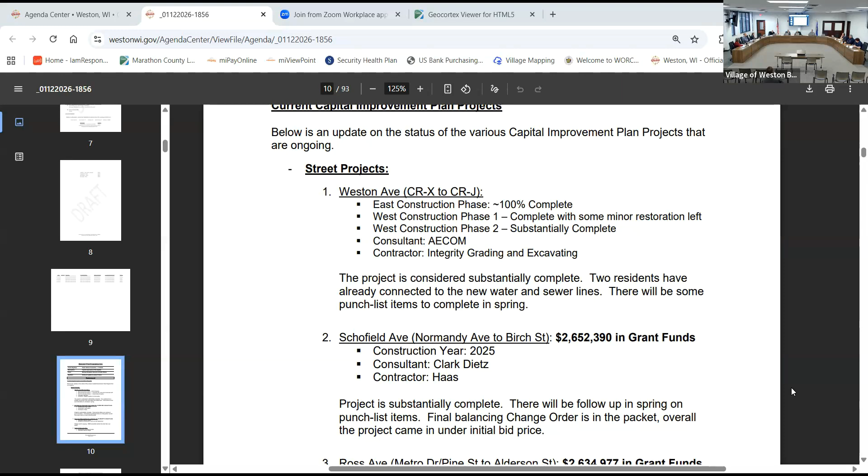And today we were notified that the Village of Rothschild is looking at repaving Bellwood Ave, which is one of our older water main areas just off Alderson Street, north of Weston Avenue. So we're going to see if we can quickly sneak in a water main replacement on that roughly quarter-mile stretch of roadway this summer.

So that actually is helpful. Yeah.

This right of way for the roundabout - how much does it affect people at those corners where they're taking property? At Metro, the majority is the southeast corner. Really, at both projects - Alderson and Metro - it's that southeast corner that's impacted more. Alderson should be easy because it's open.

And the Metro Drive one, if you remember we looked through that, is almost a little more oblong-shaped to avoid that greenhouse. There's a couple of houses pretty tight to the road there, so that was about moving it over closer to that southeast corner.

And it's working good, they're not angry or upset. The first meeting we had with those residents, there were some choice words exchanged initially, and then once we got through it all, now the residents there are actually pretty happy.

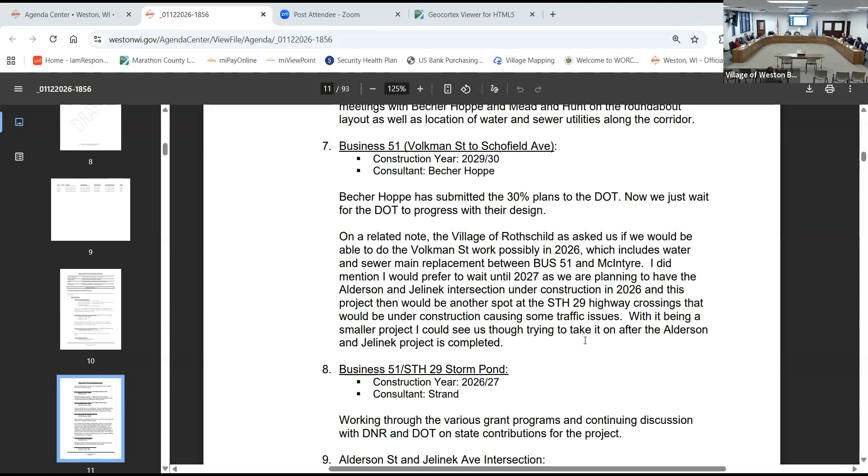Anything else, Michael? I don't think so. If I missed something I'll come back to it later. I finally got back up and running. Any questions for Michael? Nope.

Do the results of that bike and pedestrian master plan impact any of this? Because there was one in here about what's our preferred design for future roadways, including pedestrian paths. You're talking about Concord, the typical section? Yeah, the Concord typical section. I mean, that's just specific to that project. That was just my thought as I read through, I saw your notes and thought, does that impact that decision, or we don't know what the report is yet? I don't believe Concord Ave itself was noted as necessarily an area of concern village-wide.

I just wanted to bring it up as it went through.

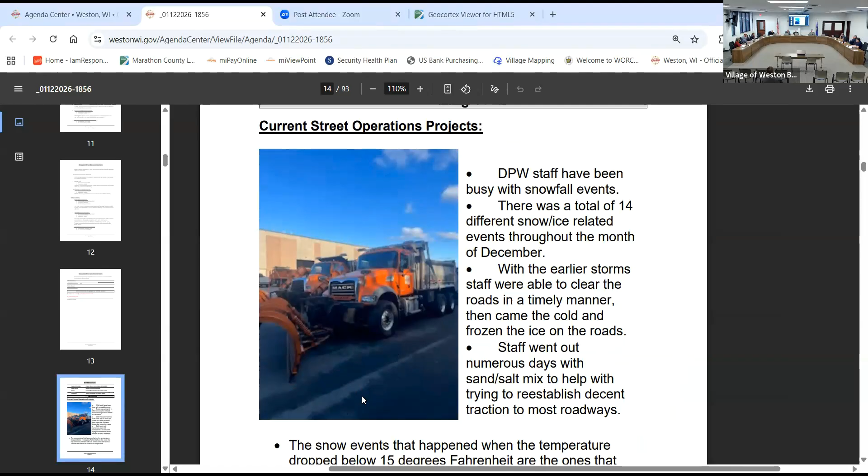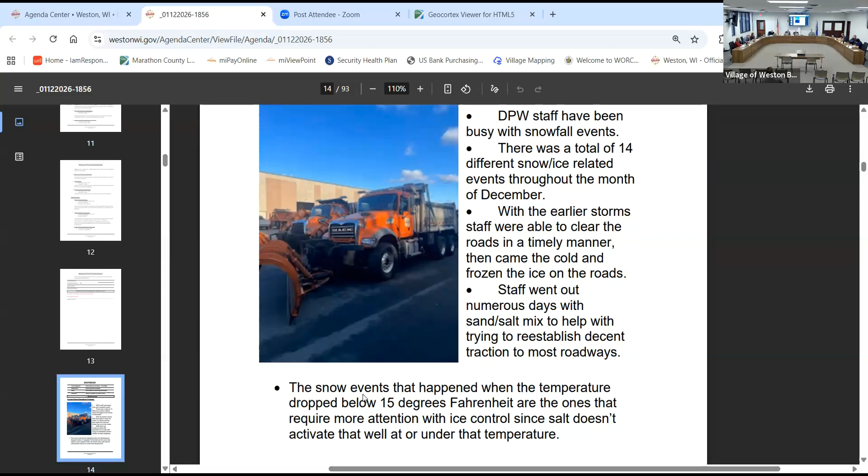Item 8, street operation update. DPW staff has been pretty busy with snow events, a total of 14 of them added up throughout the month, a lot of them smaller, some bigger. Staff was able to keep the roads clear in a timely manner, but then came the cold weather and packed the snow down. That meant a lot of trips out multiple times with sand salt mix to help with traction on the roadways, because the salt doesn't work very well below 15 degrees Fahrenheit. So we put down the sand and salt to help burn that in.

Are you finding a shortage? You probably got enough for the year, but is there a shortage? I've not heard of any. I've heard contractors are not being able to get it right now. Right, but we still can as a municipality. It is 2 weeks out though when you order, from the date ordered. So there is something going on with the shipping, yes. Okay, thanks.

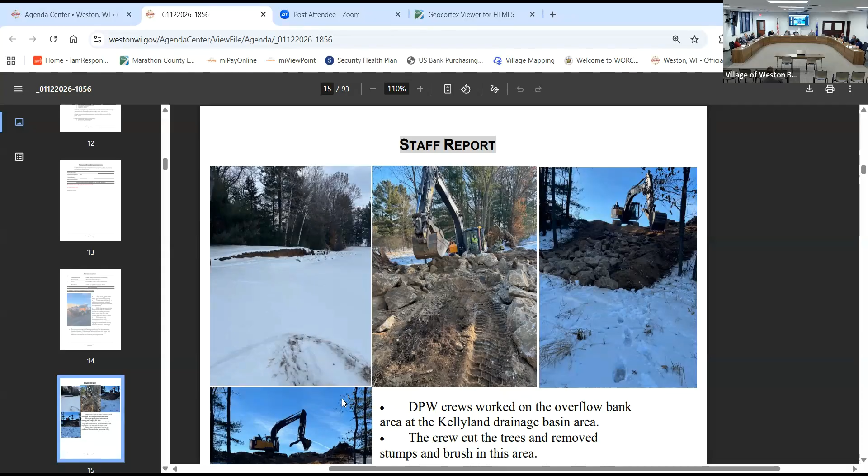Crews also worked at the Kellyland drainage basin area, installing the overflow. They cut the trees, removed stumps and brush from the area, did the excavation of the dirt, and put the fabric and riprap rock down in that section for the pond. Staff will finish the topsoil and seeding of the area in springtime.

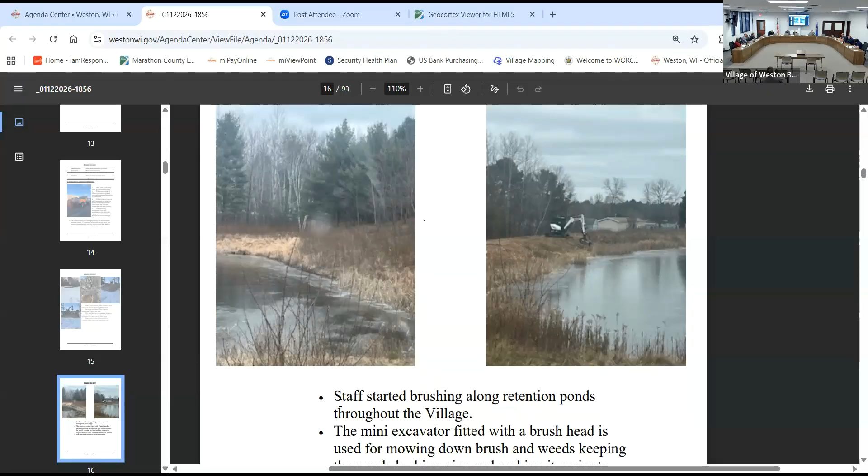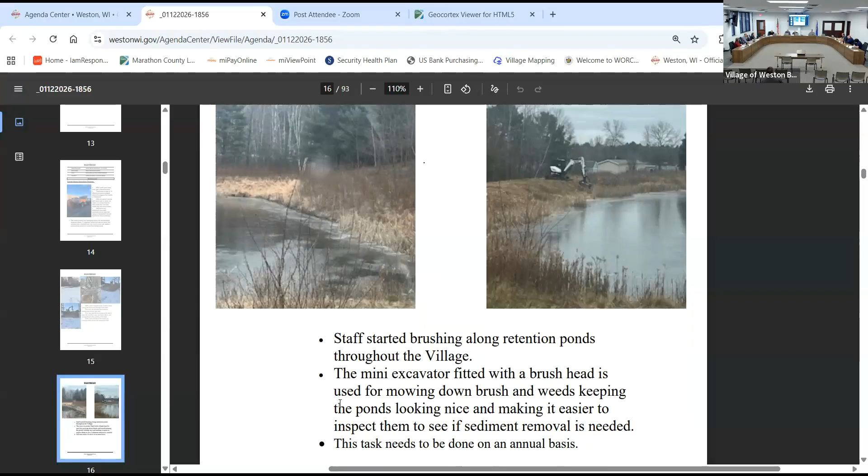Also, they got brushing along retention ponds throughout the village, mowing down the brush and keeping the weeds down, which makes it look nice and makes it easier to inspect them to see if sediment removal is needed. This task is done on an annual basis, otherwise it gets out of hand quicker.

Staff also had a lot of hand brushing, walking along the ditches to do, where there's fences and other obstacles that we can't take a piece of machinery into. Cut by hand, drag it up, put it on the road, load it up into trucks. We try to do this work throughout the winter so that come summertime, it's done.

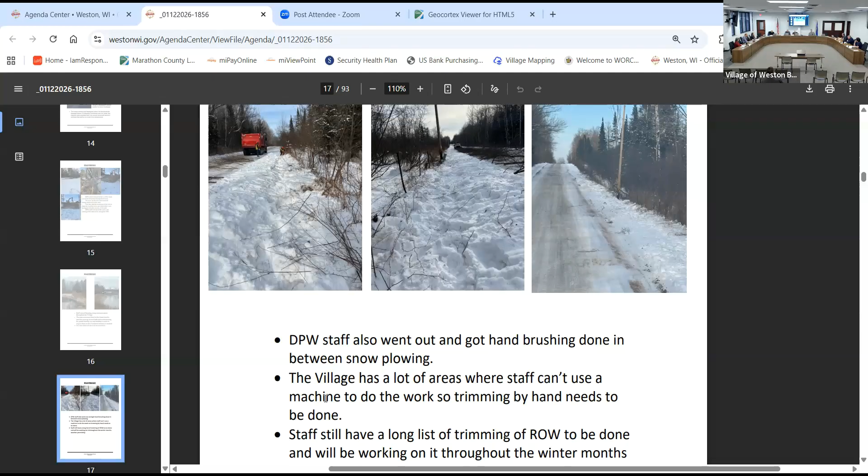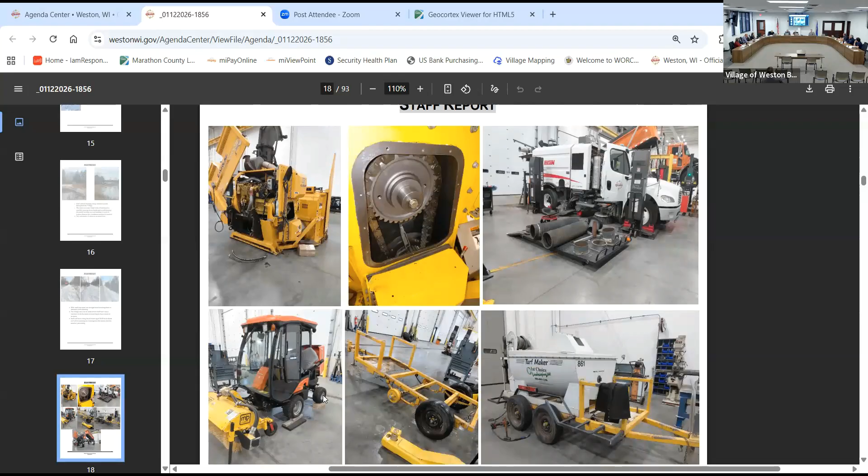Is there a machine out there to cut those brushes? That last one I just stated on was all done by hand. The guys go in the ditch and trim it by hand with the chainsaw, then throw it up onto the road where we take a loader, scoop it up, and load it into the truck.

Anything else? Go ahead, I'm sorry. Oh, go ahead. I'm just going to keep going.

Okay, and then for the shop, got a lot going on there too. Got the 113 LaRue snow blower, that's the loader mounted one. They have to replace the drive chain and add a tensioner.

The street sweeper is in for a major service of worn parts. For inspection, they'll be replacing them. The rest will be sandblasted and painted, and they'll replace wearable parts such as the center boom and skirting.

The Parks turf cat hydraulic pump was replaced. To fabricate the trailer for a hydro seeder, they repurposed a trailer that used to be an old cement trailer we used. Now they're mounting our hydro seeder to it. I did include some details there about the weight ratings and all that, since the trailer needs to be significantly functional for what the weight will be on that trailer.

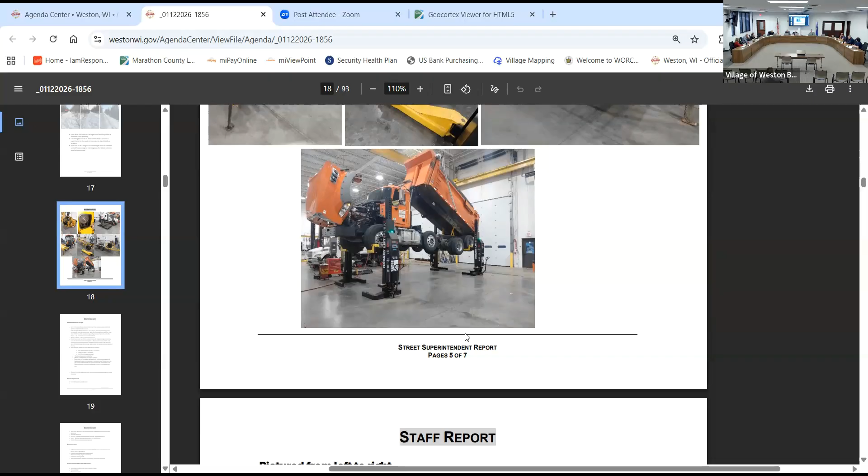Unit 25 was serviced and checked over, they did brake chambers and rear spring balusters. Unit 38 was checked over. Unit 202 had the bypass valves replaced. The radio was also cutting out, they had a wire shortage there. 231 was serviced.

Unit 10 had some headlight issues with plowing, replaced the relays. Number 7 had tires replaced. Number 6 also had the plow wiring harness replaced.

For seasonal work, continue to inspect snow equipment such as worn pins and loose parts. Inspect and replace hydraulic hoses, replace cutting edges as needed, fabricate curb guard. Shop staff has also been helping out with snow removal for plowing.

The youth apprentice assisted with the hydro seeder trailer. He serviced 231, repaired unit 7, and helped out with repairs to the street sweeper. He also completed all the repairs on 202, replaced the pump on that turf cat mower sweeper, and did shop and equipment cleaning.

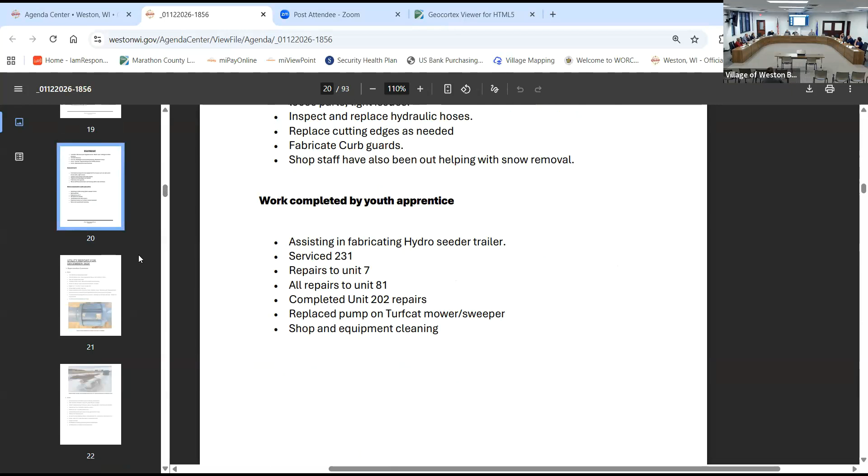That's it. Question from board? Yes, and I should probably know this, but I don't.

Can citizens come anywhere and get salt for their sidewalks? It seems to me in the old days they could go to the salt shed. We got a sand barrel that's available in the turnaround, the U-shape there, where they can come get the sand salt mixture.

Correct, it's available. And that's sand - we actually never allowed anybody to grab salt from us, but we did allow them the sand. Doesn't say they didn't grab some. They may, if they went into the salt shed and grabbed salt, I guess they weren't supposed to, but we have always allowed sand to be utilized just because it's a twentieth the cost or whatever of salt.

Okay, anything else? Oh, that's it. Thank you. Item 9, utility operation update.

With some of the weather, our guys have been able to get into our well houses and lift station buildings and give them a little TLC. They noticed some heater failures, some heater improvements that needed to be updated, so they did replace a thermostat at Kerry Well. At the same time, they noticed there was a leaky check valve they had to repair.

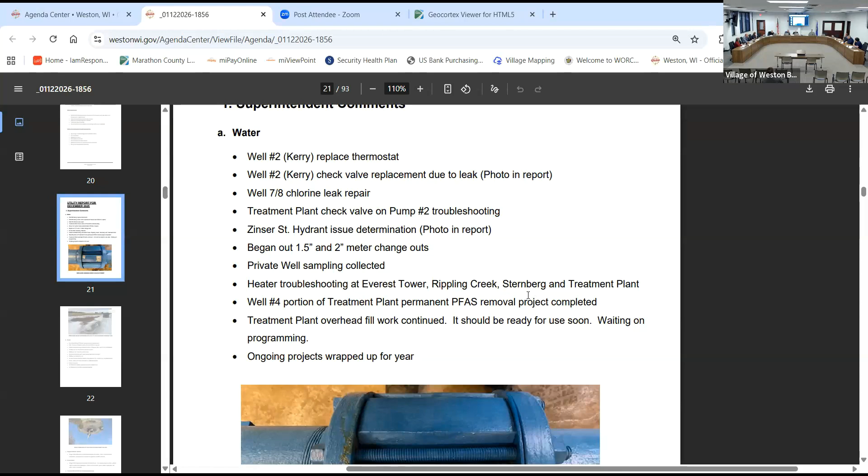Michael touched on the well, I guess our treatment plant project, well 4 portions completed. Well 3 should be, I don't know if they'll have much work over the winter months here.

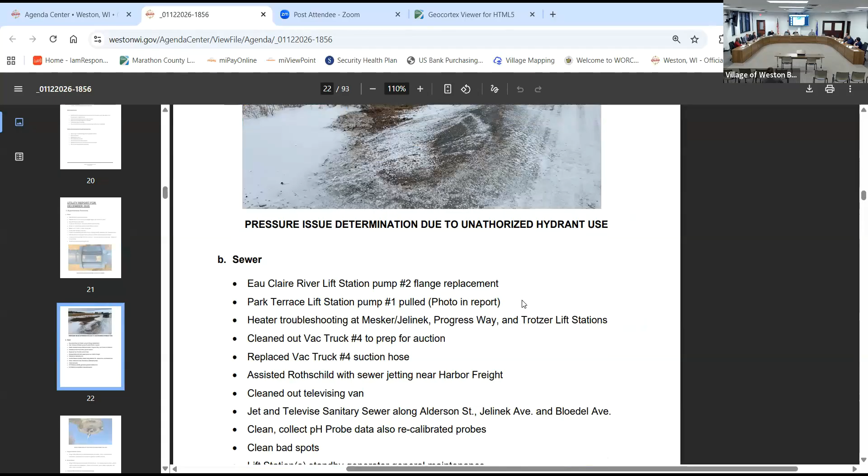We also did have kind of an oddity with some pressure issues that some businesses found over on Progress Way and up Zinser. After some investigation, there's a photo included on here, we had some sort of somebody either opened up a hydrant and slammed it shut, because we had a number of businesses along there that showed their fire suppression systems had a big pressure spike. They were asking if we had noticed anything within our system with pressures exceeding into the hundreds.

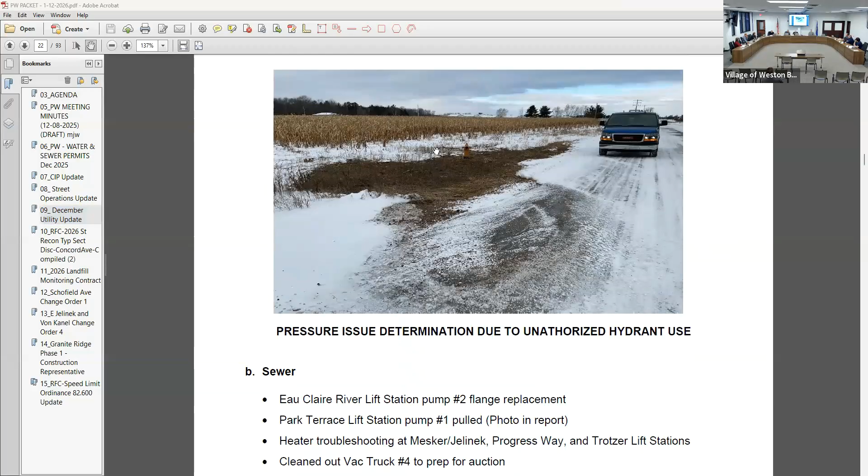So we had said it's physically impossible based on any type of tower elevations or anything our pumps can produce. And then when our operators were out, they noticed a hydrant on Zinser. There was a clear area around this hydrant. So we don't know if somebody was messing around or a contractor used something, opened it up, got some water, and closed it fast, and it was just kind of a back pressure.

I'm not much of a conspiracy theorist, but I have my own thoughts. I'm assuming, but the timing of it was odd, this would have happened either overnight or very early in the morning. Because I got in with a nice easy day on my plate, and all of a sudden we got one call and then a whole bunch called. So then it was like, well what the heck's going on here. So we tried to track down if there was more across the highway, so we just noted it in there. We've kind of been in contact with some of the businesses, but I think everything's okay with it. It's just another thing where you didn't expect something like this to happen. I don't know what we could do to prevent it, but it's just one of those things we get to deal with that pop up throughout a day here at the Village of Weston.

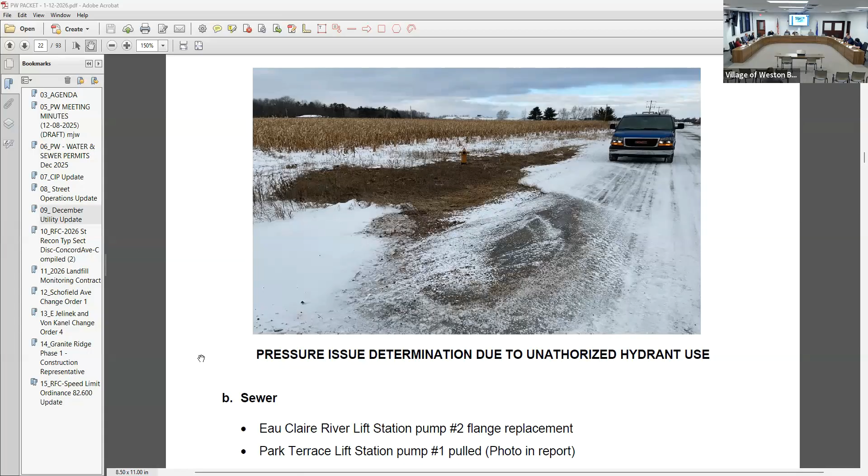Sanitary side of things, we had to pull a couple pumps, replace a flange on a pump at our lift station, Eau Claire lift station. The photo included in here is from our Park Terrace lift station, you can see the plug.

With the heaters, we did some work over on the well houses. We also troubleshooted some of the heaters at our lift stations as well. Prepped our old vac truck, gave it a couple things that needed to be repaired, so when we get that out for auction, I don't know where we are with that. Later this month, this month we might put it out there.

We did assist Rothschild with a couple sewer needs they needed as their truck was in the shop, went over and helped them clean a plug in one of their manholes. We did some televising in preparation, jetted and televised some areas over by Alderson, Jelinek and Bloedel for some upcoming project design work. Dealt with cleaning our pH probes, cleaned our bad spots. Some of our general maintenance and pump filter replacements.

Digger's hotline should be minimizing quite a bit here over the next handful of months. Work orders have been slowing down as well, other than some of our meter changeout stuff, and contract work slowed down as well. Other than that, we have some of our customers added. We also have our water pumped for the last handful of months, our wastewater flows, and our lift station hours. That's it.

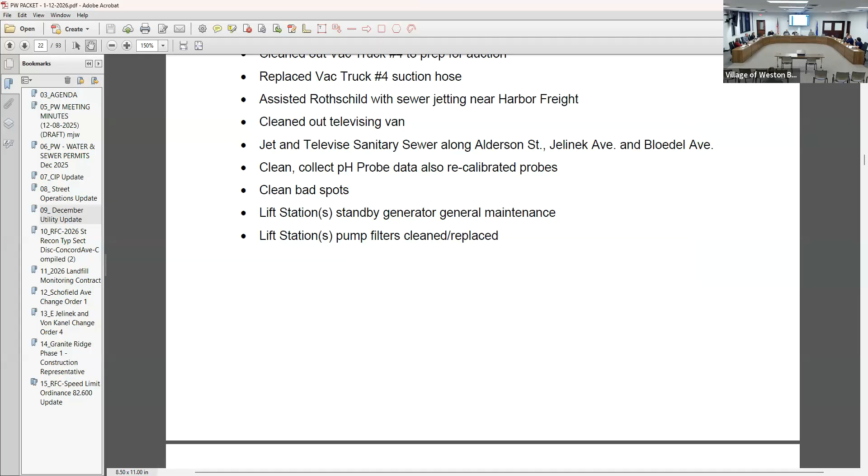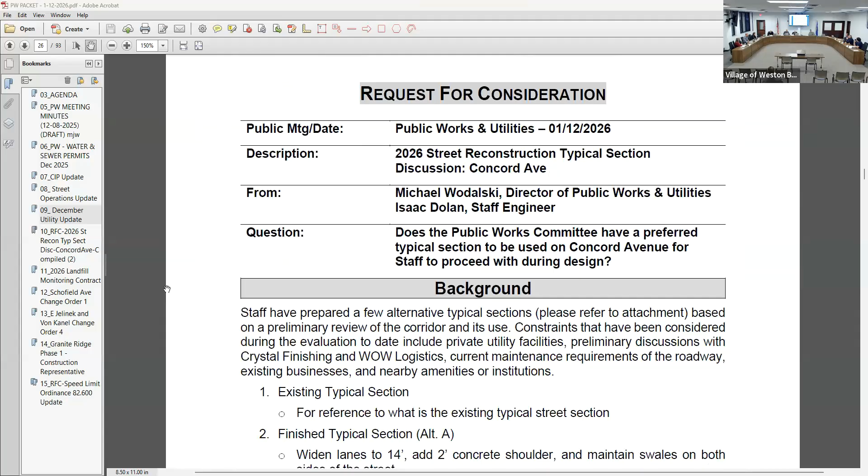Policy discussion and recommendation, item 10. I do have one other question.

Before I came, I was reading the survey they put out that they asked us to review, and in there it says since 2010, about 50 new housing units were built each year.

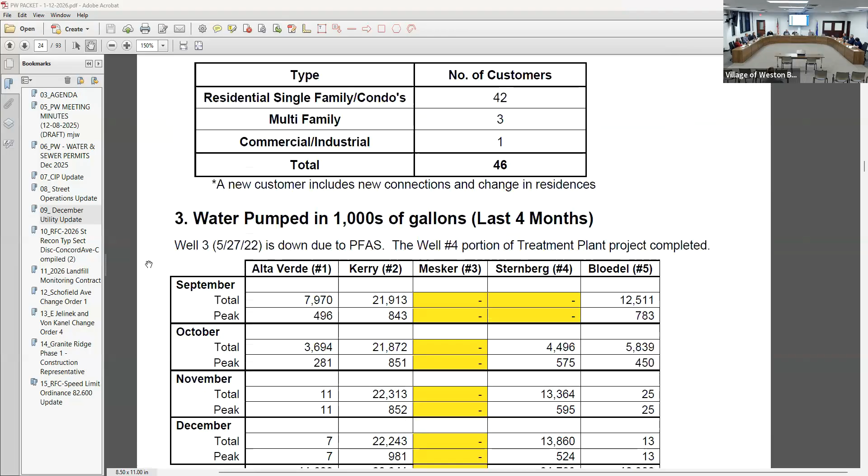And then when I look at new customers, I see 46 in a month. So I think we've been debating if it's worth putting on, because it could just be a change of customers. A house sold and a new person came on, so it's not new homes put in.

We should put that, because we get that every month too, don't we? Yeah, maybe I should put an asterisk: 46 in one month, 50 for a year. That's what we're saying.

If we go back to item 6, like the water and sewer permits, lateral meter permits generally are the new houses, the new buildings that are getting built. To me, this would be better if we just netted it.

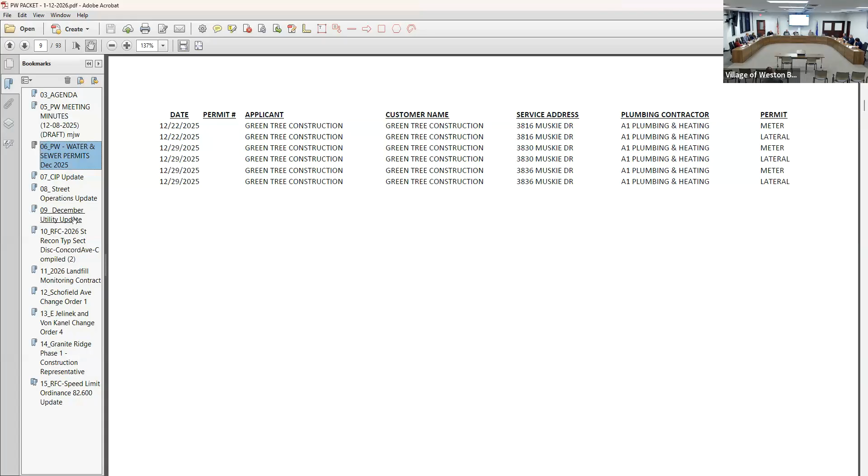So I wonder if we could have a report run that actually shows what's a new home versus what's just a change of customer. Because when I think new, I think new house, an incremental addition, not somebody moved out, somebody moved in and the name changed.

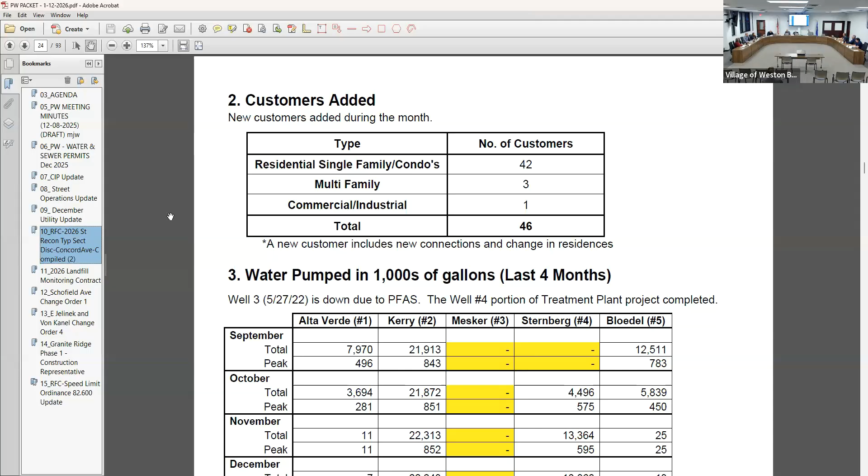All right. Item 10, 2026 street reconstruction. Typical section discussion, Concord Avenue.

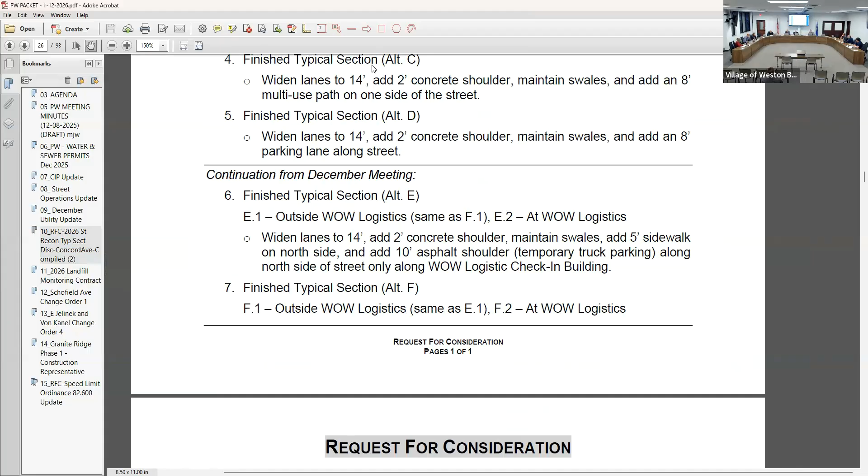At the last meeting, it was requested to bring two additional typical sections to address the needs of the commercial properties there, WOW Logistics, and how they've historically used the corridor by providing extra width of pavement. So there are two typicals on each sheet: one outside of the WOW Logistics area, and the bottom one is within WOW.

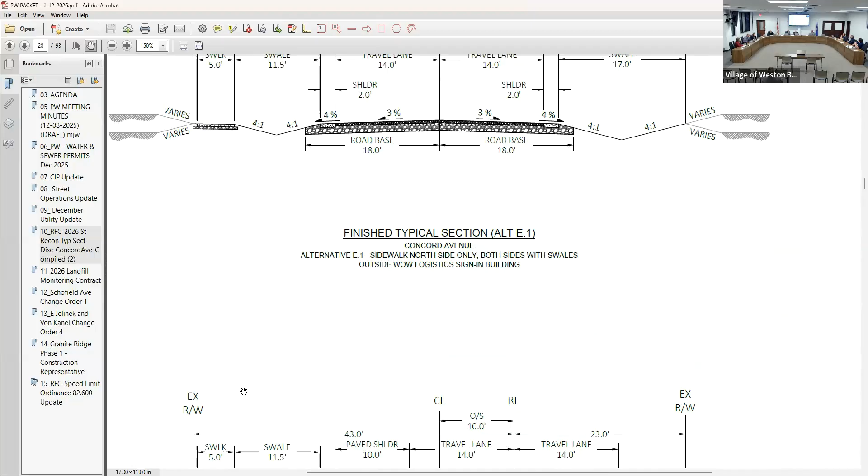One typical section, so if we go back a sheet, one more, right there - this is Alternate E. Essentially that top one you see is what the typical roadway is for the road.

Once we get to WOW, it widens out to provide an additional 10 feet of parking, essentially for their vehicles that need to check in to figure out what bay they need to go to. So essentially we're paving the gravel shoulder that's maintained several times a year for the trucks that are parking there - that's mimicking what's currently out there.

And then the next sheet for typical section, which is Alt F, is the exact same typical outside of WOW, but then shows just giving us 5 feet of asphalt on both sides, so that trucks could pull off to the side. Traffic that has to pass through would essentially center the line and pass through and pause to go in between.

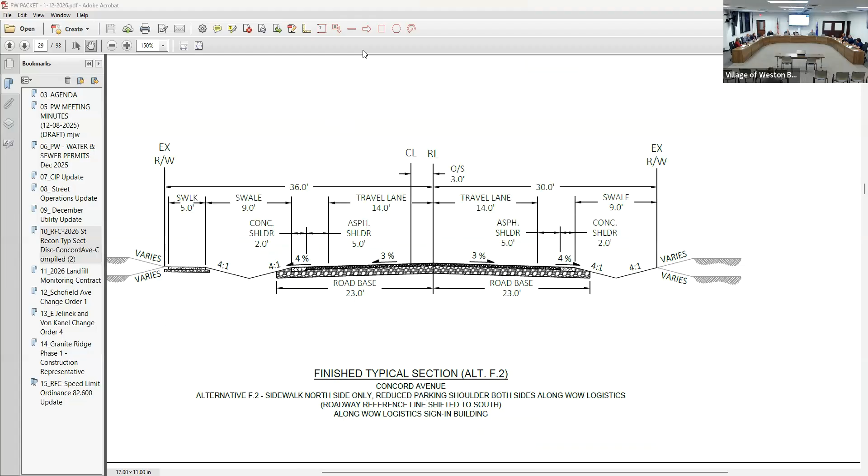But it provides parking space on both sides of the road for any trucks that might be coming both ways. There's not as many coming eastbound - most of them, from what I've been able to see, are westbound. So that first alternative is mainly for the westbound trucks parking next to the check-in. I can try to zoom in here with an aerial as well. Isn't that going to increase the cost significantly?

For this short distance, we're essentially adding a lane. For both alternates E and F, one is putting 10 feet on one side of the road, and the other alternative is putting 5 feet on either side. So essentially it should be the same cost, just spreading it to either side.

Right now if you go through there, the gravel shoulder on the north side is where they're parking. This isn't necessarily perfect, but it's a parking lane, and then the two travel lanes would be on the south side. So we'd give them space on the north side to park as they go to check into this facility.

No one besides this facility really needs that. Nobody else utilizes that area. If we did it anywhere else, it probably would not get utilized. Is that a fair statement? Yeah, I think so.

So what is that distance? I was just going to grab that. And then those other bump outs, that's just driveway access, right? Those are the driveways, just to connect to their drive or parking areas. The driveway itself, I want to say it's in the ballpark of like 500 feet. Was that approximately the length provided? A quick measurement, yeah, probably about 650. Okay, so a little bit longer.

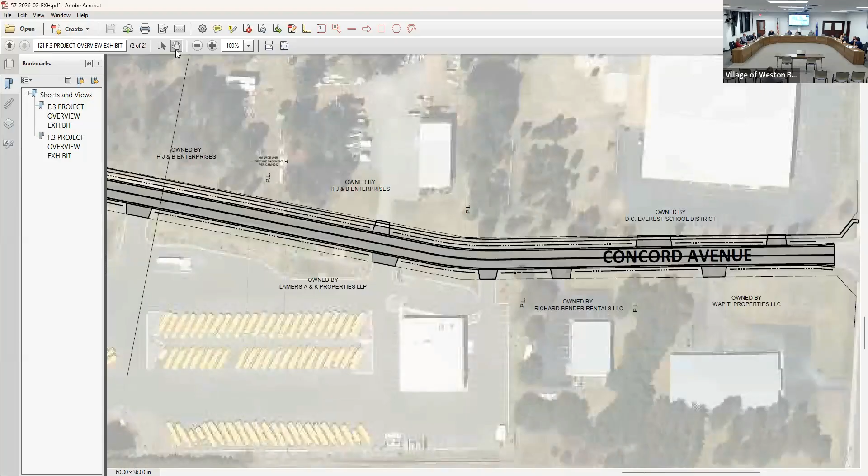So like Isaac was saying, this option allows a 10-foot lane on the north side, that's option E, and then option F, if I figure out where I'm at on the plans, has 5 feet on each side. If they park on that 5 feet, still part of a truck's going to be on the road. No, it's 10 feet.

So he had two options: one was 10 foot, or two 5-foot sides, but the two 5 feet still equals 10 feet. So with a 14-foot lane plus that 5 feet, essentially it's two 19-foot lanes. If a truck parks in that 9 feet, it still allows a 10-foot travel lane. It's maybe not ideal, you might have to cross the center line slightly, but there is adequate width for vehicles to pass. Even if semis are on both sides, that center should still be open for vehicles to pass through.

Does staff have a recommendation between E and F? I personally would probably say E, and just have it on the north side, because I think most of the traffic turns off of X here and heads west. They check in there and then most of the docks are all west of there. I don't know of many trucks that come in from the west side and park on the south side of the road. That's what I remember from our discussion. I thought E was probably the best. I don't know if you guys have a preference one way or the other.

When I've driven through there, the most I've seen is probably one truck, maybe two max, on that south side. Majority are on the north side when I've driven through. At the end of the day, there's still the same width of pavement, so even if a truck pulls onto the south side, there still should be room for a vehicle to squeeze through if there are vehicles on both sides.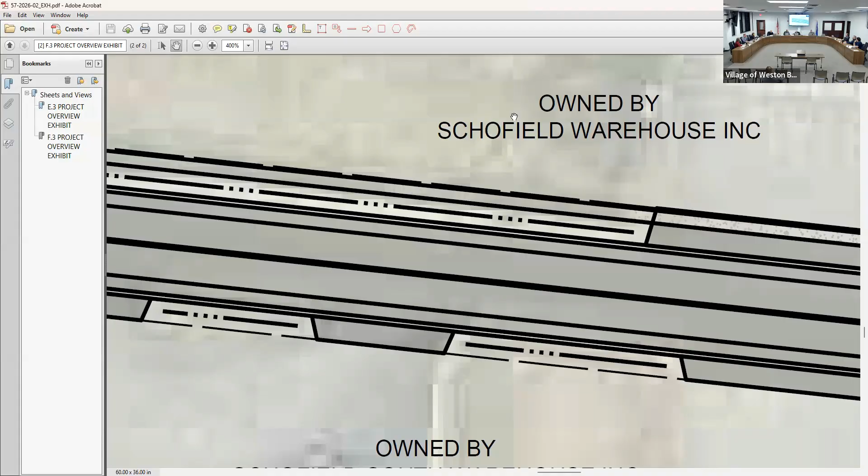Okay, I have a question. If I read this right, you're still talking about a walking path, I'll call it, as opposed to sidewalk from Camp Phillips to this area? It would just be a 5-foot sidewalk on the north side of the road then.

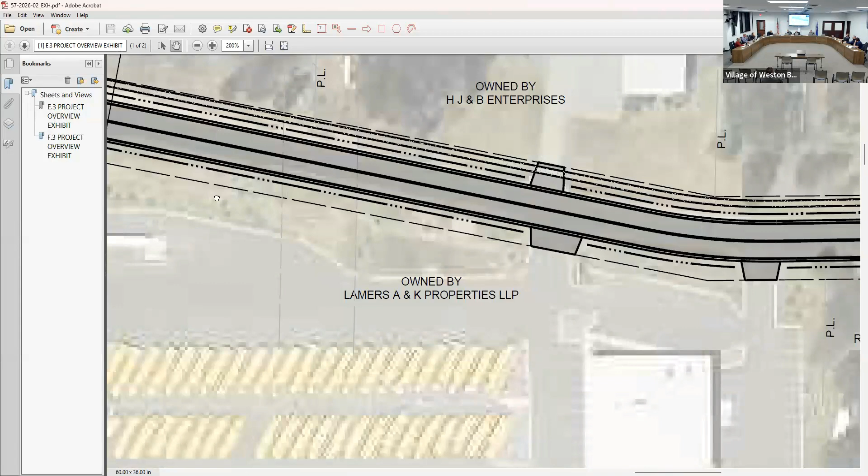Okay, my first question is, are there a lot of people walking this road? Because I go by there, I don't specifically look, but I've never seen anybody walking there.

And then my second question, coupled with that, is who's gonna be responsible for winter maintenance? They would be, if it's a sidewalk, it's their responsibility for shoveling and maintaining, being the business owner. Correct, yeah. So the school and WOW, and then whoever.

Crystal Finishing once you get into there. Okay, I just, first off, really wonder the necessity of the sidewalk, because I never see anybody walking there. I see them walking on Camp Phillips a lot.

Yeah, I know, we've had our employees walk down there, but I'll be honest, I don't know if I'd want to walk down that road either. Yeah, like 6 semis. Right. But maybe one there's a vehicle.

If there's something off the road, that wouldn't be a problem then. I mean, there isn't that much residential really in that area. There's, correct, some, but more to connect the residents to it.

And I'll just give an example, because I'm in the Fuller area, and on that street, most people did not want to walk or run or do anything because there was no sidewalk and it really wasn't very safe in my opinion. As the traffic count went up and up and up, I think maybe that's one of the reasons you don't see any of it, you know.

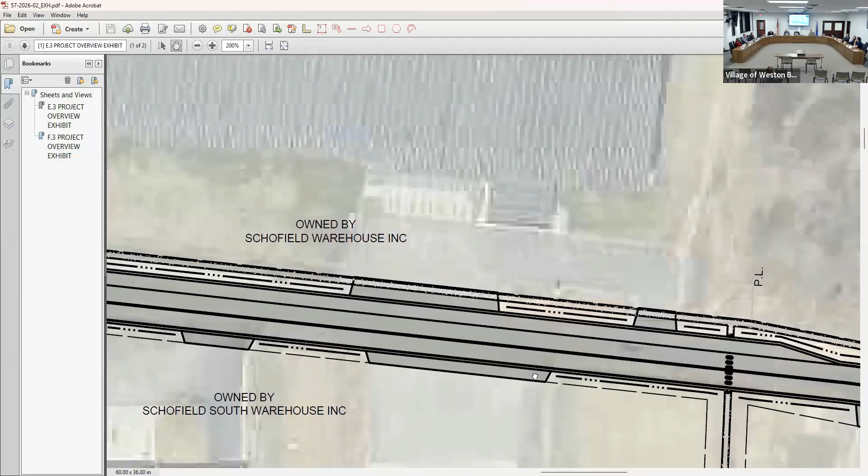It might be people that want to walk to work. It isn't uncommon in other areas that people, if they live close by, can walk to work, can bike to work. A lot of it is rental housing in that area too, so it's not necessarily people that have even the luxury of a car to get to the warehouse or the factory to get to work, so.

I know sidewalks are the worst topic to have discussions about because everybody has an opinion and nobody can seem to ever agree on it. We've been all over the board, from we don't put sidewalks in to we put sidewalks on everything. So here we're trying to come up with these hybrid approaches of what makes sense in an area. And I know last meeting we discussed how, with the employees there, the Link Health Fitness thing...

Alderson Street's a great example. North of Ross Avenue, we had to put a sidewalk in on that project as part of a DOT grant in 2012. There was a meeting held because the Schofield council member was adamant that a sidewalk was unnecessary. We met out there with some of their council members, our administrator at the time, myself and Keith, and we were being berated about why, nobody walks, there's no need for a sidewalk here. There were about 4 or 5 people walking in the road because there was no sidewalk, and one almost got sideswiped by a semi.

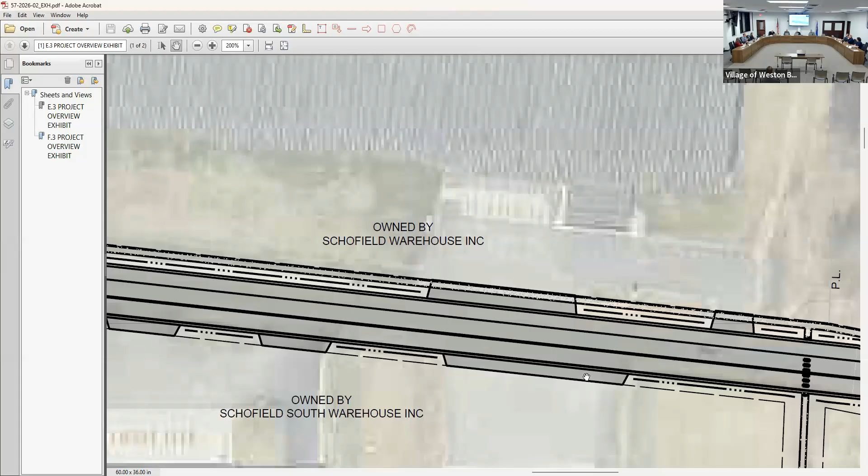And the guy stopped talking immediately and was like, okay, I guess we'll put the sidewalk. So we can always say nobody uses it, but there's a couple of people that do use it. Or to Roy's point, they're not using it right now because it's semis all day, every day.

And who wants to walk next to that? So if we give them an avenue to use it, now all of a sudden, hey, that makes a lot of sense. All the semis are still gonna be there.

I was just gonna say, we talked at the last meeting about the school being there and there's that connection point, that we could maybe even build a slight path to make the access to the school a bit more efficient. And then the other piece is Birch Street hooks up to this, and you could hook Birch Street up to our pedestrian bridge if the sidewalk at least went up to Birch Street on Concord.

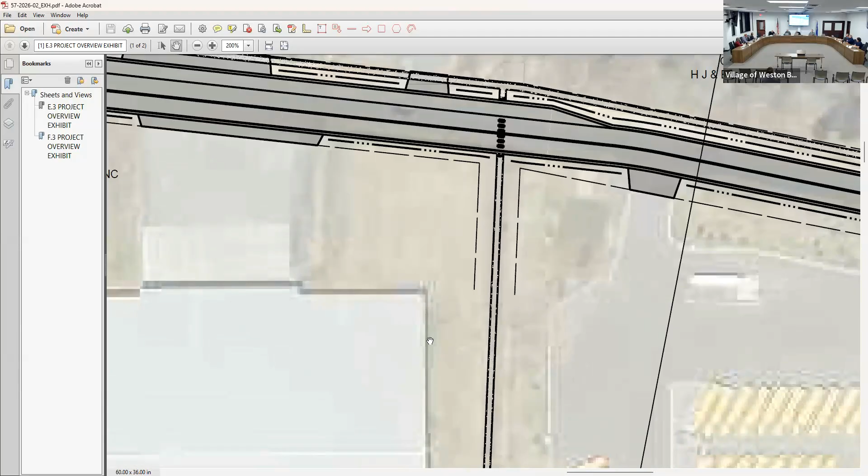Yeah, so in my experience at Weston Supply, driving in every day for 15 or 20 years, there really wasn't much traffic, walking traffic, pedestrian traffic on that road ever. And the residential area to the south...

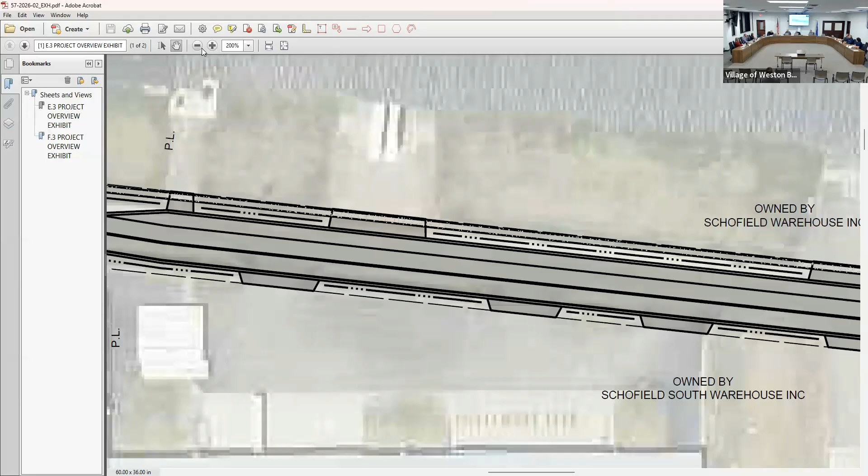For me, so what would the cost be to put that sidewalk in? I mean, that's gonna be pretty significant because it's really quite long. And what are you gonna do when you cross the driveways of...

Warehousing in Wisconsin? I mean, would you actually construct a sidewalk there? I mean, if you do, then it's gonna have to be at least 6 inches thick. Yeah, because of the trucks backing across it?

Yeah, so you'd put a thickened section of sidewalk through there. So if we have it on one side, I guess we'd try to pick the side that has maybe fewer driveway entrances so that it's not as much of the thickened concrete, but yeah.

Well, the thing is, some of our road, there was no traffic on it. And I used Camp Phillips here. I used to bike on this. I dare you to ride the bike now on Camp Phillips. Yeah, you're talking about there was no traffic. Yeah, you could go from one end to another end, maybe you'd see one car or two cars pass you.

But today, wow, that's not even—that sidewalk there, I mean nobody was walking there before. They put the sidewalk, people start walking on it. So it just, yeah, if you build it on Camp Phillips, they come. It's used a lot. Sure, I would agree with that.

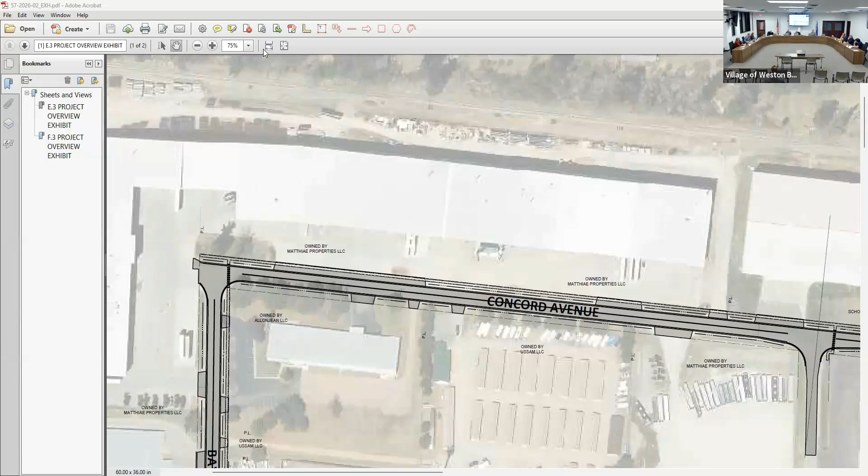The trucks that are coming there are, for the most part, coming off of Camp Phillips. Not saying you don't get some guy that gets lost, so to speak, but that would make the most sense on that side. My recollection is their driveways are all asphalt other than a strip of concrete they poured, where when they crank down the dolly legs on their trailers, they land on it. Seems to me they put that in some years ago because the dolly legs were hard on the asphalt.

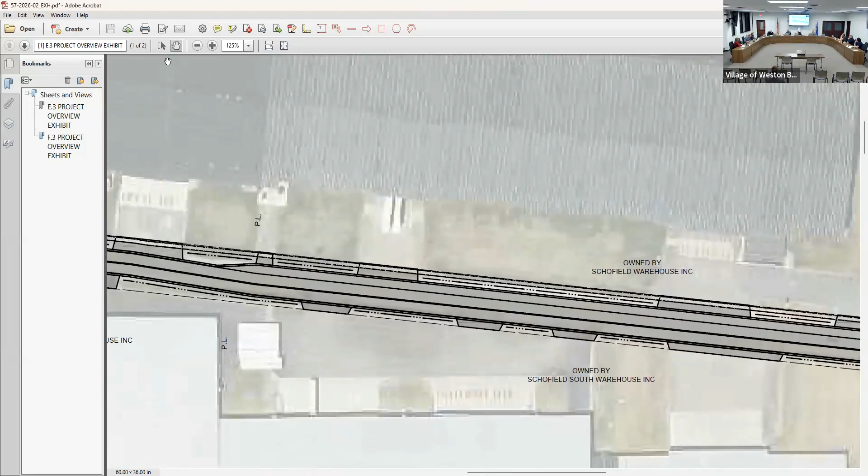So as you move that sidewalk towards their building, I'm wondering if a trailer and tractor, if the sidewalk won't be in the way, so to speak. If you look at this aerial, you can see this is a trailer here, so it looks like the sidewalk would be clear of the actual tractors. Yeah, and that wouldn't be such a big deal.

Is that enough? Isaac? Yeah, all right. Motion to table till next month. Well, you wanted a recommendation. I think we all agreed on E, correct? I need a motion.

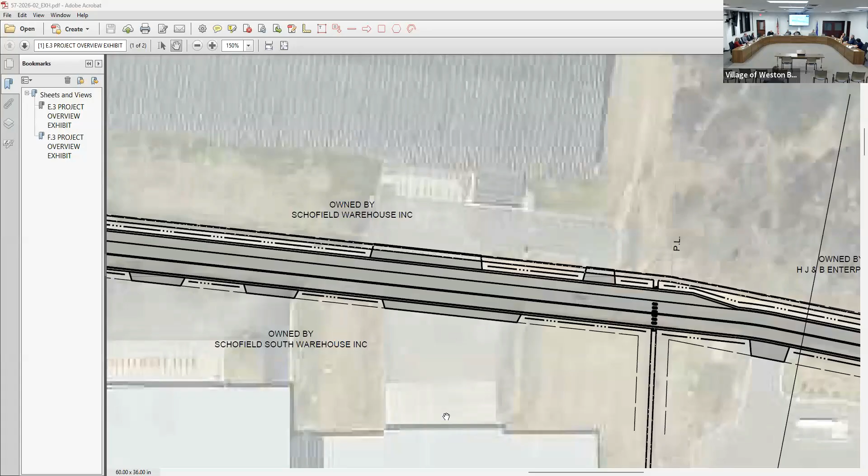I'll move to recommend that staff proceed with typical section alternative E, including the 10-foot asphalt shoulder, for the 2026 CIP plan for Concord Avenue. Is there a second? Discussion? Are you going along with E as a motion, or to put it off till next month till they talk to them?

Well, the question is if we want to assess it or not, right? Or, oh, okay. I just believe we should assess it. All right, so, building it is definite, the assessment is a different issue we can discuss. I guess the question is, we probably should have a stance of whether we would be assessing it.

Okay, I can amend that motion if you'd like. I'll amend it to say, I'll move to recommend staff proceed with typical section alternative E, including the 10-foot shoulder, with that cost assessed to WOW, for the 2026 capital improvement project plan for Concord Avenue.

Okay, first we're gonna vote on the amendment, and then we vote on the motion. You just need Fred to agree to that amendment, since you were the second on that, yes? I'll agree to the amendment. So you just second, right? Yeah, second the amendment. Okay, so all in favor of the amendment, signify by saying aye. Aye. Opposed? Ayes have it.

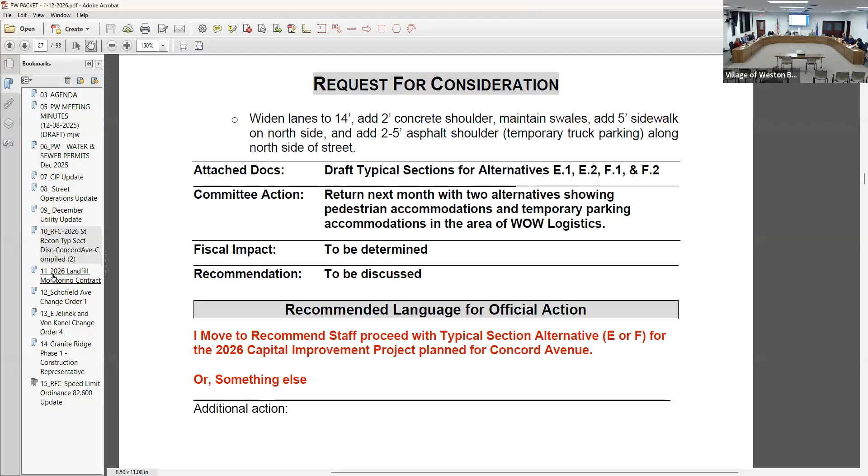Item 11: 2026 Weston landfill gas extraction and groundwater monitoring service contract.

Mi-Tech, or before them Central Wisconsin Engineers, has been monitoring the closed landfill, which is now the dog park. The proposal in the packet is for continuation of their services through 2026. This ensures we comply with all DNR requirements for the gas extraction system and groundwater monitoring required for the closed landfill. We have $30,000 in our budget this year for maintenance and engineering costs of the system, and $23,350 is within that budget.

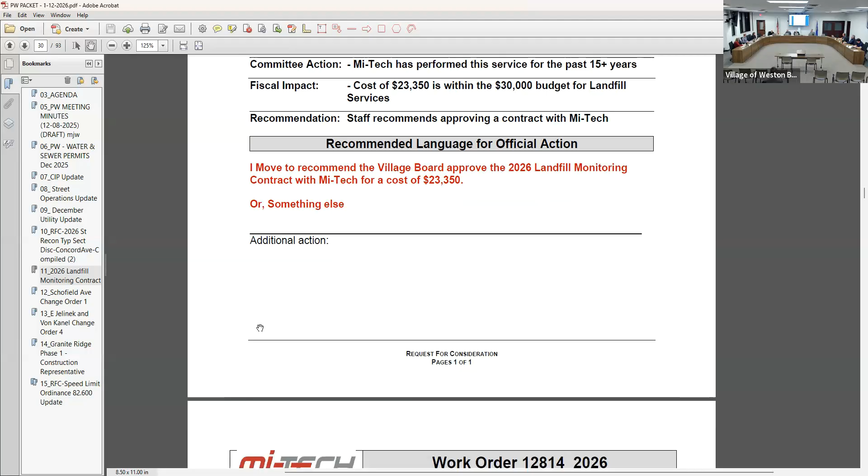Move to approve that contract. I have one question. They've been doing this for 15 years. Has there ever been any consideration to see if we could negotiate a longer contract with a reduced price? Oh yeah, we probably could. I mean, usually it's really a time and materials cost. Oh, it is, okay, I wasn't familiar with exactly what this is. I just looked at it, they've had the job for 15 years, at least, it would have been at least longer. They built it, they constructed it, so they know the system very well.

I just wanted to ask that, maybe keep that in your back pocket for the future, when you discuss it with them next year—I assume you'll be back on this again, right? Yeah. So, is there a motion? I made a motion. I'll second. Any discussion? All in favor, signify by saying aye. Aye. Opposed? Ayes have it.

Item 12. The Schofield Avenue, Normandy Street to Birch Street, change order number 1.

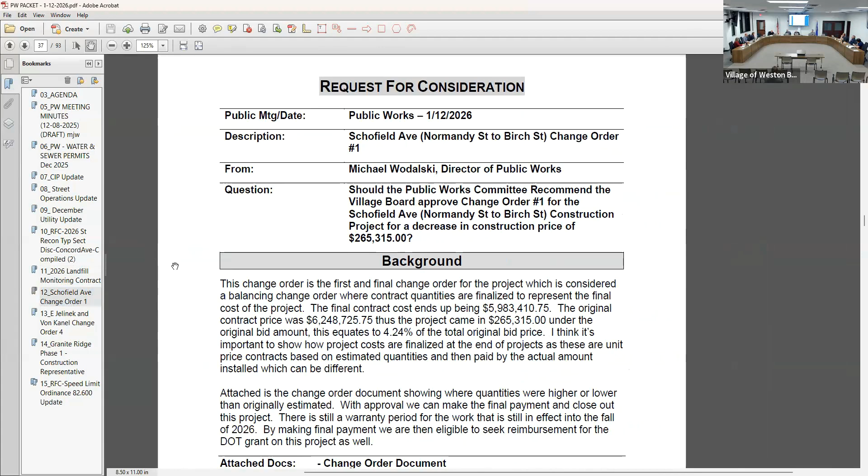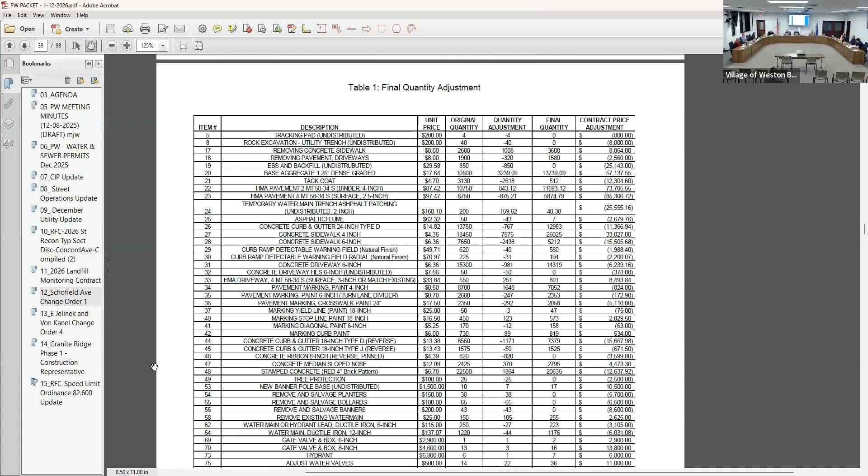This is really just a balancing change order at the end of the project for contract quantities. There's one modification. We were notified on Friday that the tack coat number was not correctly reported, so there was an extra $10,000 on that item. So instead of being under the bid price by $265,000, it'll be about $255,000 under the original bid price for the Schofield Ave project. Other than that, this finalizes all the bid quantities and is kind of the final pay app agreement between us and the contractor. Upon making final payment, we can submit our grant reimbursement from the state for a little over 2.6 million.

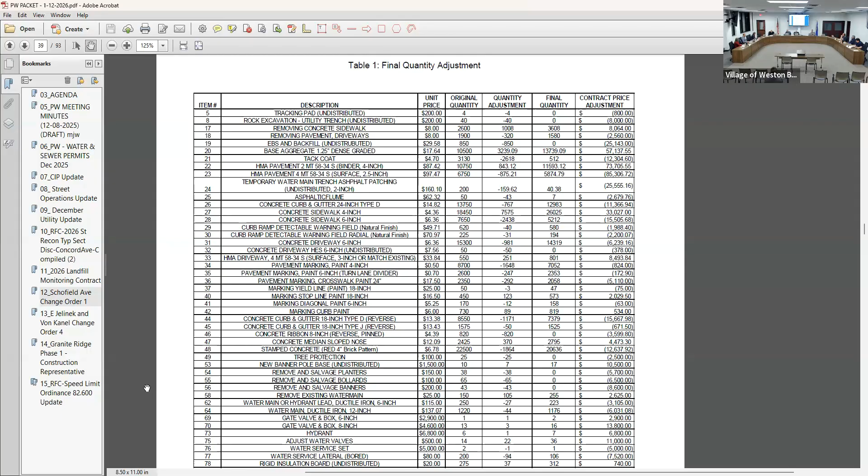I don't know if you have any questions. Some items were over bid quantity, some came under. I try to tell people the original bid is an estimate based on the plans and specs, and you hope you accounted for everything. When you say it's going to be 13,750 feet of concrete curb and gutter, and it ends up being 12,980, you're off by 700 feet, but it's pretty close.

I move to approve change order one on the Schofield Avenue, Normandy to Birch, construction in the amount of $5,983,410.75. Is there a second?

Is that the right numbers? Yeah, so there will be a slight change. I don't have it verbatim, so for the board meeting I would have the updated number for the tack coat, so it'll probably be about 5,993.

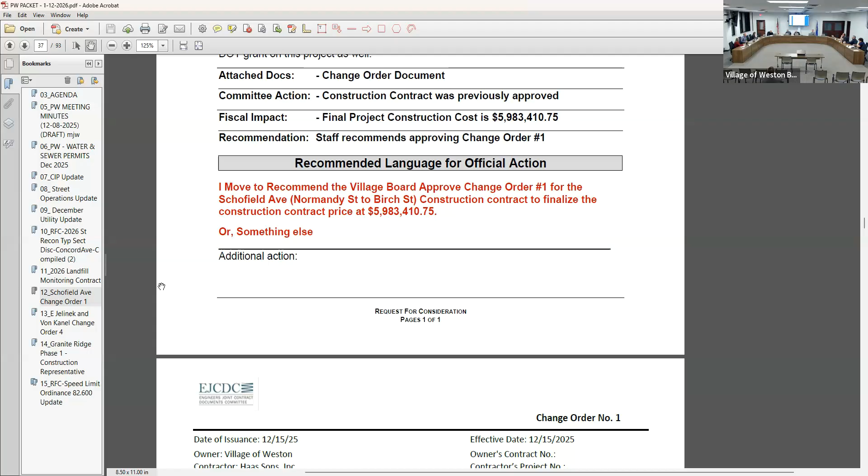Or you could say contingent on the tack coat number being corrected. You have to make some correction based on Michael's comment on that motion. Yeah, just contingent on the tack coat number being finalized. Is there a second?

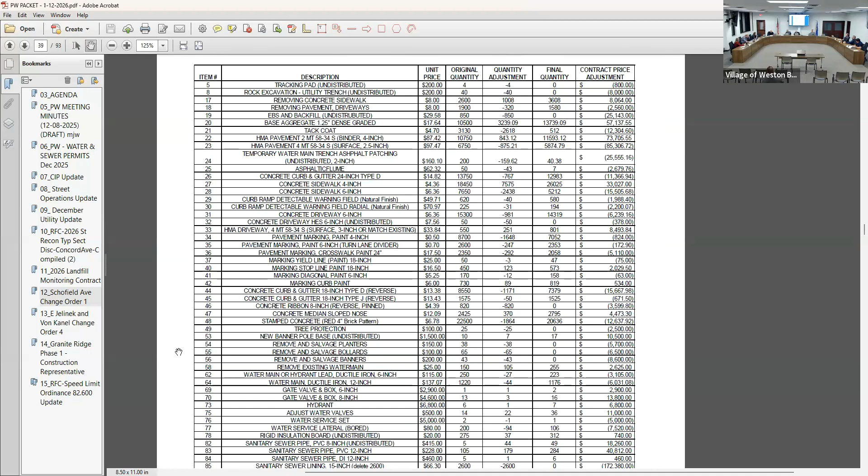I'll second. Any more discussion? All in favor signify by saying aye. Aye. Opposed? Ayes have it.

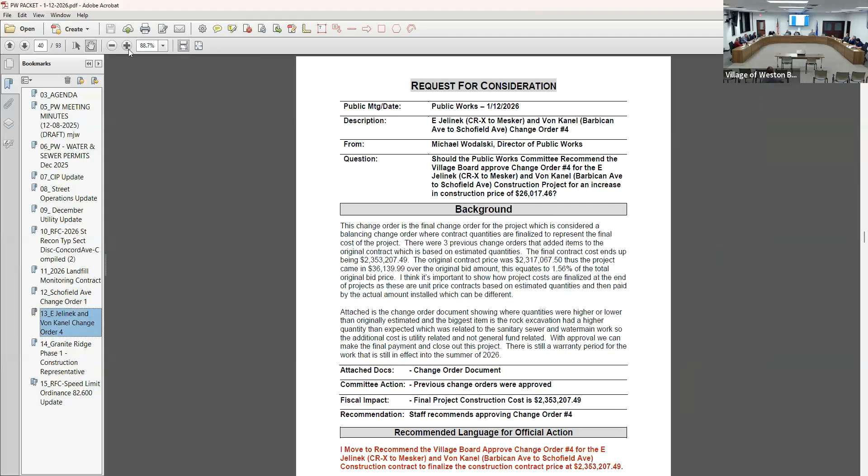The largest item on this one was rock excavation, primarily for the sanitary sewer up towards East Jelinek towards Tower Bridge Place, going up the hill there. Was that at the intersection? Yeah, it was just east of Kirk Street there. There was more rock encountered than what was planned for the utility installs there.

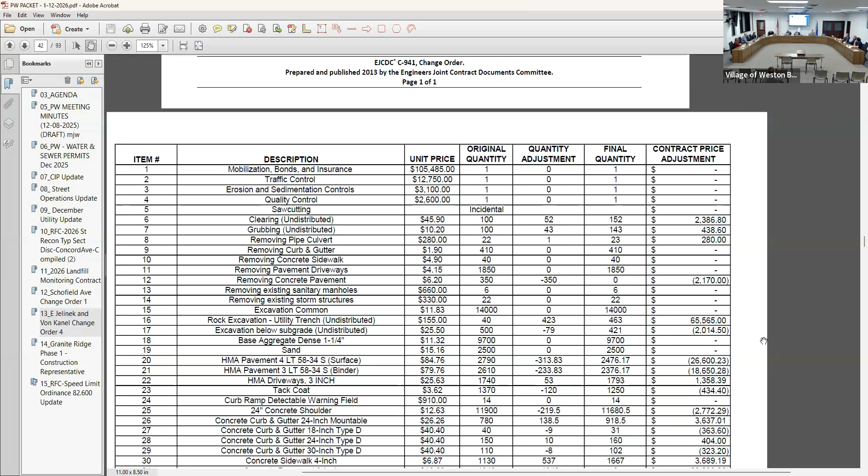I thought we talked about that, remember? She was sitting right over there. Yeah, and again it's one of those things where you have borings. We had a number in there of 40 yards. It was actually 400 yards.

Anything else, Michael? No, everything else is like I said. Accept the motion on that.

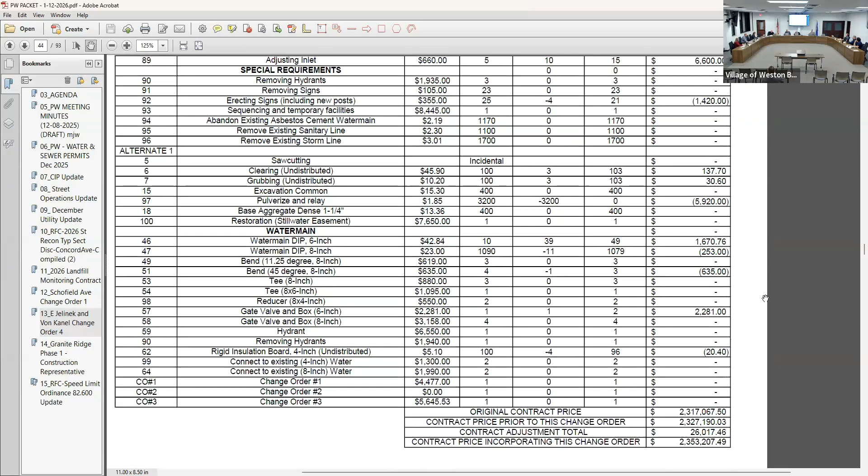I move to recommend the village board approve change order number 4 for the East Jelinek and Von Kanel to Schofield Avenue construction contract, to finalize the construction contract price at $2,353,207.49.

Second. Discussion? All in favor signify by saying aye. Aye. Opposed? Ayes have it. Thank you.

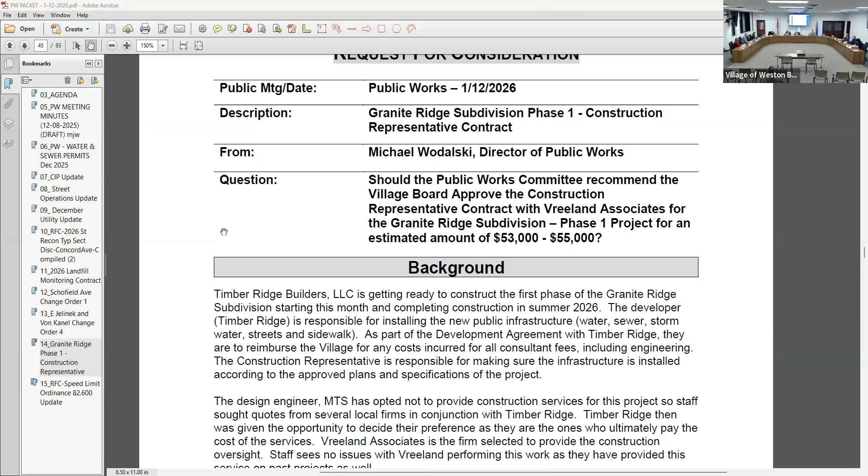Item 14, construction service agreement for Granite Ridge subdivision. As part of the Granite Ridge subdivision, which is being built at the end of Old Costa Lane, Timber Ridge Builders has been working with MTS as their design engineer. MTS was not interested in being the construction inspector on that project. A proposal went out to several other firms, and the subdivider has chosen to go forward with Vreeland Associates. In these cases, the contract with Vreeland is between the village and Vreeland, but as part of the development agreement, any costs incurred that the village has, we bill the developer for.

So the developer ends up paying for the inspection services. Vreeland has done the construction oversight for the Hinter Springs subdivision and currently is under contract for the Green Tree Acre subdivision as well. I've had no issues, no concerns there, so I'm okay with it. Don't you have the staff, experienced staff to do that? Yeah, they're a smaller firm, but it's the same people that were overseeing Hinter Springs who would be working on this one as well.

Have you seen his resume? I have, yes.

You know what I'm talking about? Yeah, okay. I mean, Dustin Vreeland is a registered professional engineer, and then they have one or two other staff members as well that are on site. Right, the staff's gonna do it, the registered engineer is not gonna do that. He does sometimes, supervise them. But still we need the staff resume to make sure he has enough experience and we don't have a problem. So this firm doesn't utilize summer interns or some of that stuff like other people might have, so.

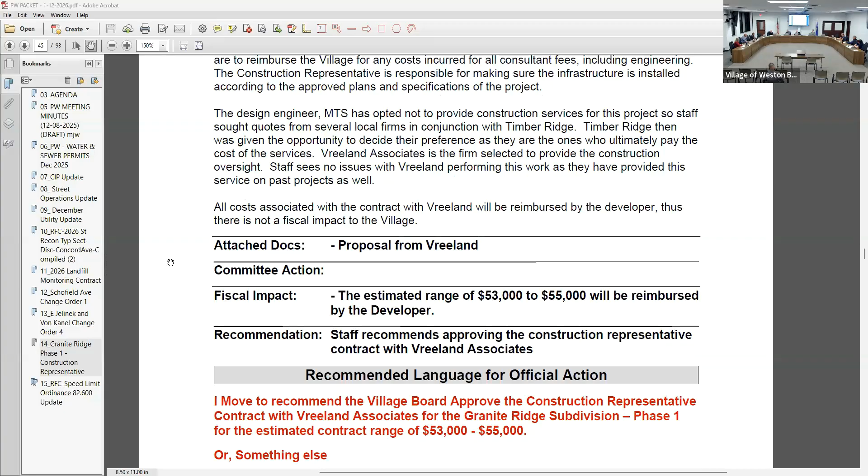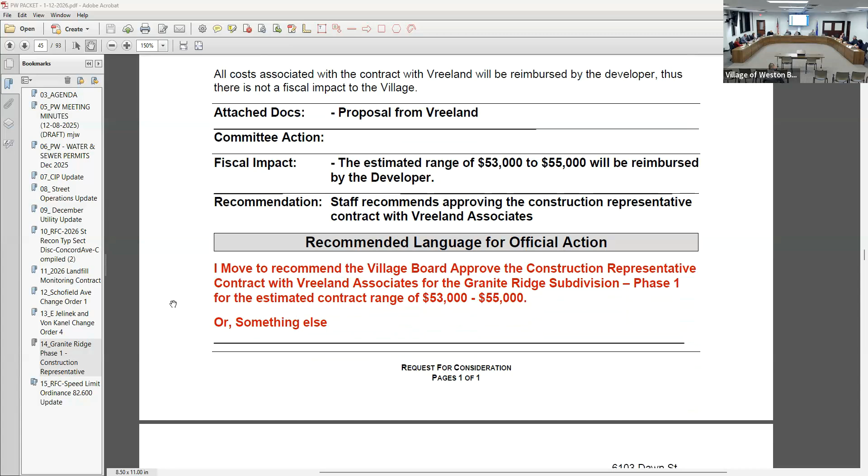What's your wishes? I'll recommend the village board approve the construction rep contract with Vreeland for the Granite Ridge Phase 1 for an estimated contract range between 53 and 55,000. Is there a second? Second. And the developer paid that. It's a little bit of, we pay and then bill the developer to pay us back. Did you have a second? Roy did. All in favor, signify by saying aye. Aye. Opposed? Thank you.

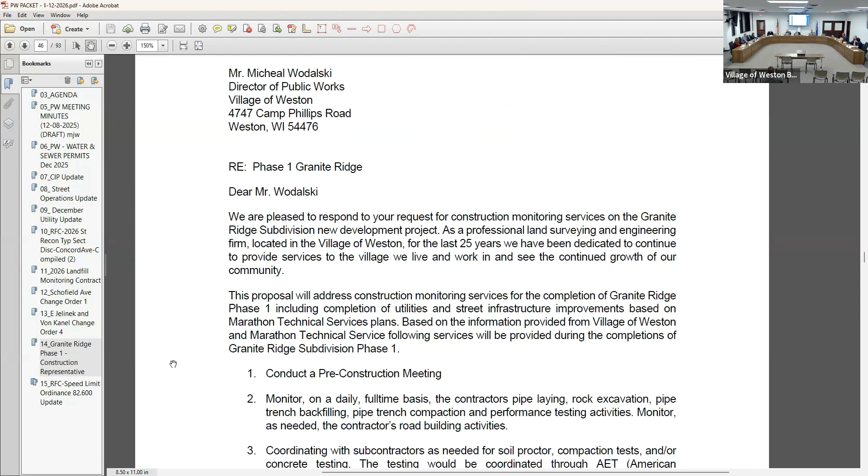Okay, now the important one. Speed limit ordinance, update chapter 82.600.

Are we gonna have a staff presentation of this? Because this is what I wanted to ask you. I called Michael, when I read this over the weekend I was confused about this whole thing. Then I saw the email come in from Lewis and I got more confused and concerned. So I called Michael this morning and asked him, if I'm a private citizen and I come into the village of Weston and say I have a concern about the speed limit on a road, where are you sending me? And he said, to the Public Safety Committee. I said, not to the Public Works Committee, correct? And he said, correct. I said, because to me the Public Works Committee, we should be building roads and maintaining roads, but it seems like this purview of the speed limit is really not our business, so to speak. So I said to him, I don't know if I even want to get into this because I feel like I'm intruding on another committee.

There is only one thing here. We're building it, but we're building it according to the design of the engineer, and he's designing it for certain speed limits. He's not just building it. He designed it for, say, 25 miles an hour, 35 miles an hour -- the speed limit on Camp Phillips Road is 35 miles for part of it, 45 miles is the other part. There's a reason for that. So as long as we follow those and it's not part of our project, we're okay. Because as I said, it's important to see what we're designing and what we build. Now, how much is on our lap, I'm not sure.

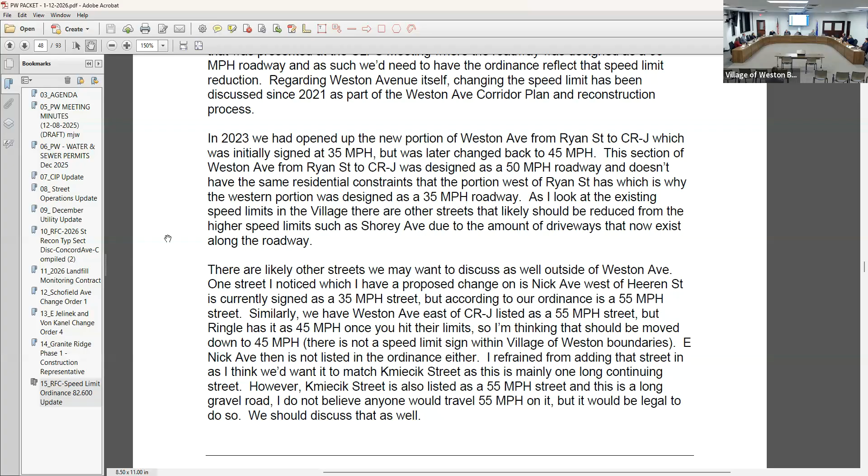Besides the Weston Ave topic, looking back over chapter 82.6, there are other streets that weren't listed that exist in the village of Weston, though there's a catch-all in the ordinance that says if it's generally a residential street, it's 25 miles per hour. Some roads have existed over 20 years without being listed. But we do have high-speed roads like Shorey and Ringle Ave, and Weston Avenue east of County Road J.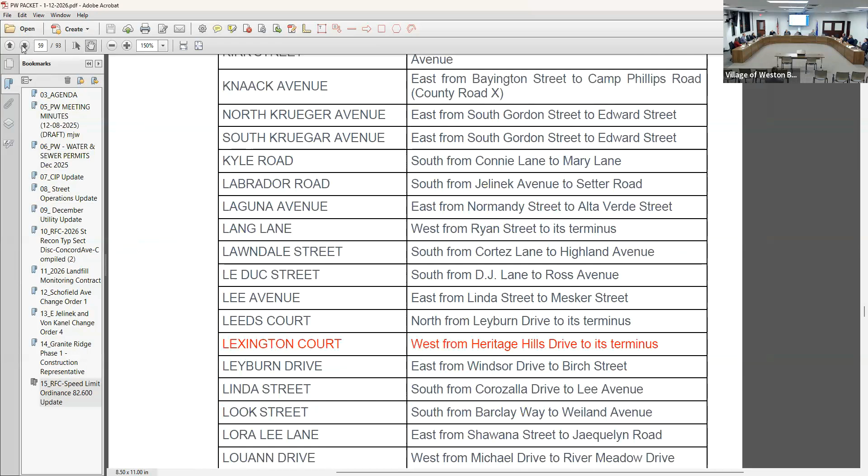Some of those streets are listed as 45, 55 mile an hour roadways, which surprised me, like Kemiecik listed as 55. Not sure who would go 55 down it, but right now you technically could. Maybe, to Roy's point, those are all public safety committee items.

As a public works committee member, I'd be happy to make a motion that the public safety committee not approve speed limits in excess of the design parameters for the roadways. That completely makes sense to me.

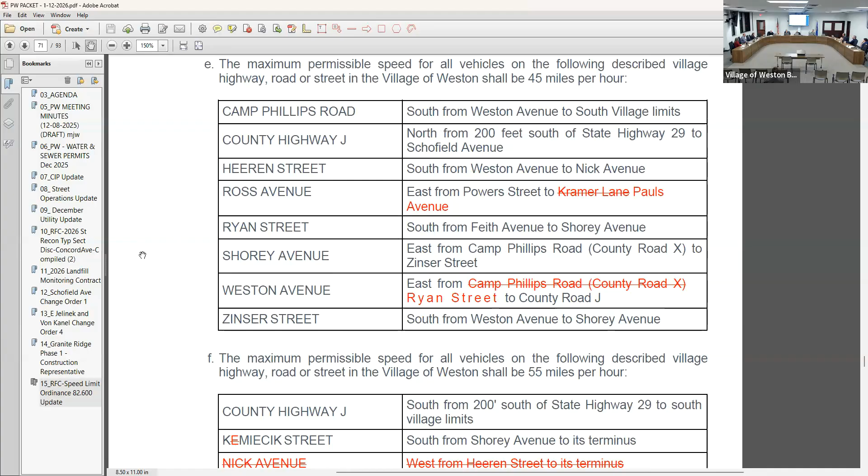It surprises me we need to do that, but okay. I don't know what area of life you go where the capacity's X and you say let's do X plus more. Things are designed for a reason to a certain standard, and to exceed that knowingly seems foolish, at least from my perspective. But I don't really want to set speed limits on roads or make recommendations because I don't think that's what I'm tasked to do.

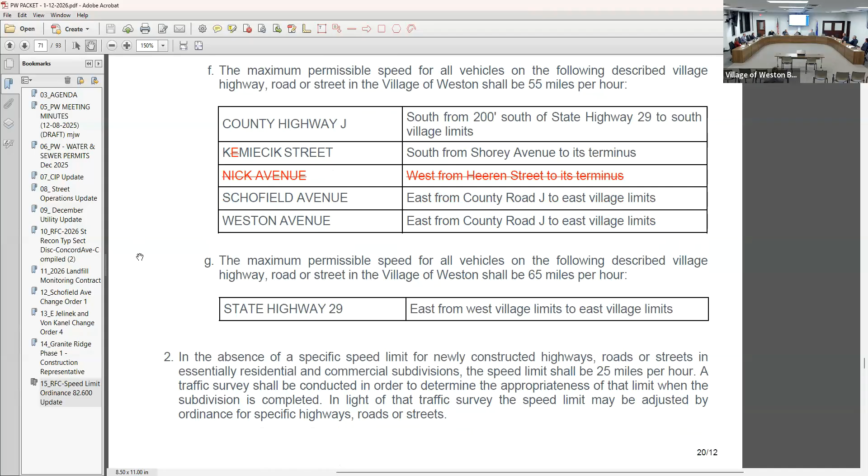I talked to one of the residents who actually lives on the road, and it's been 45 forever. He'd just as soon leave it alone because there aren't many driveways on that section. But looking at the amount of vacant land and the farm that could be developed, that could certainly change, with a lot more driveways or service entrances onto Weston Avenue.

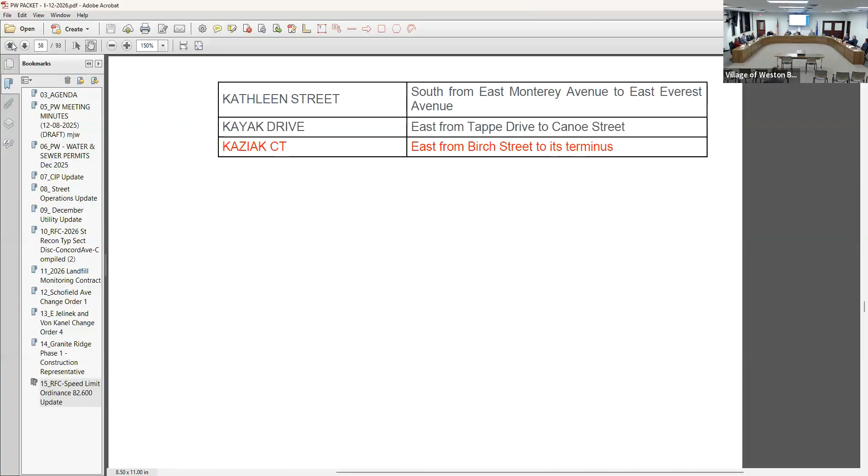During all the public information meetings and the special assessments—unfortunately I missed the meeting last Monday, I was still on vacation—those residents were advocates of having a lower speed limit and trying to get people to not drive as fast through there. Maybe it wasn't 100% of them, but I've had at least 4 of them say, hey, thanks for reducing the speed out here.

So it's kind of like the sidewalk issue, right? You're going to have people in a neighborhood who say you shouldn't have changed it, and others who say this is great, I now feel safer walking to get my mail or snow blowing at the end of my driveway. You almost have to block that out, because you'll have people who think Camp Phillips should be 45 instead of 25 or 35, or Ross Avenue should be 55 so we can get between Sandy Meadows and X quicker.

We'll all have opinions on those things and it gets tough. But just to check, did everyone on the committee read the email from Lewis?

Yeah. You did? I just wanted to make sure. I did not—when did that come, today? It came Friday, or was it over the weekend? I think it was an email over the weekend, Sunday. It was from Lewis? Yes, from the chair of the Public Safety Committee. Okay, I did not get that. He wrote an email to provide additional information.

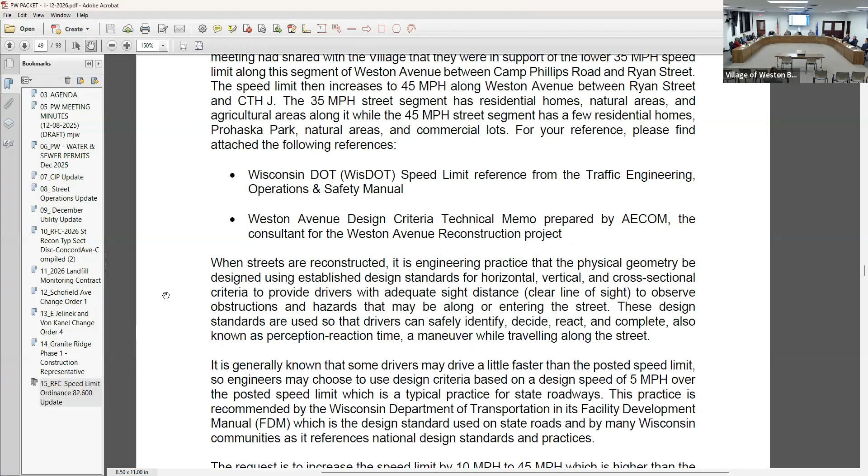I drive that road almost daily, going 42, 43 miles an hour - not quite 10 over, but also not right at 35. Whether it's vehicles in front of me or behind me, I don't see people really gaining or dropping off behind me either. Personal opinion, I think it's working okay. I know Ike put something in there about how much the travel time is actually impacted - it's like 28 seconds in that 10-mile-an-hour difference over that stretch of roadway.

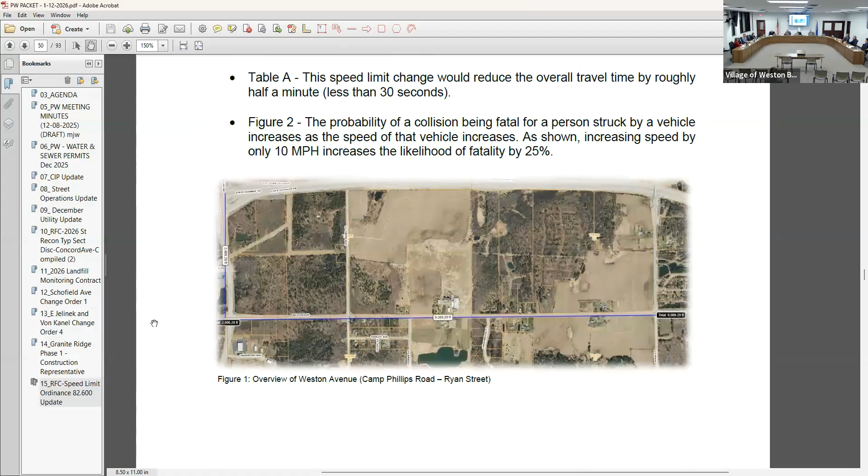The concern is also if you sign it higher, people are going to drive faster - they're not going to stick to that, they'll go higher. I don't know what's written in the motion right now, but it would still need a traffic analysis done officially. We have documentation for what it was designed for, but people are heavy on assuming it should be a different speed, then it would have to be analyzed for that. There's a ton of criteria that go into that based on that one attached document, so that could be the other direction it goes.

We don't come to a solution on the speed, but it would have to go to an engineered speed study. I believe you can work with the DOT for that. That's something CLPS could probably motion.

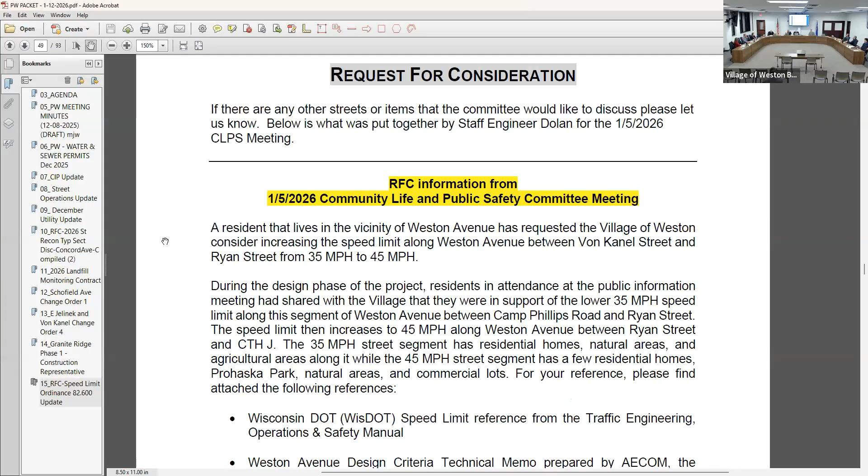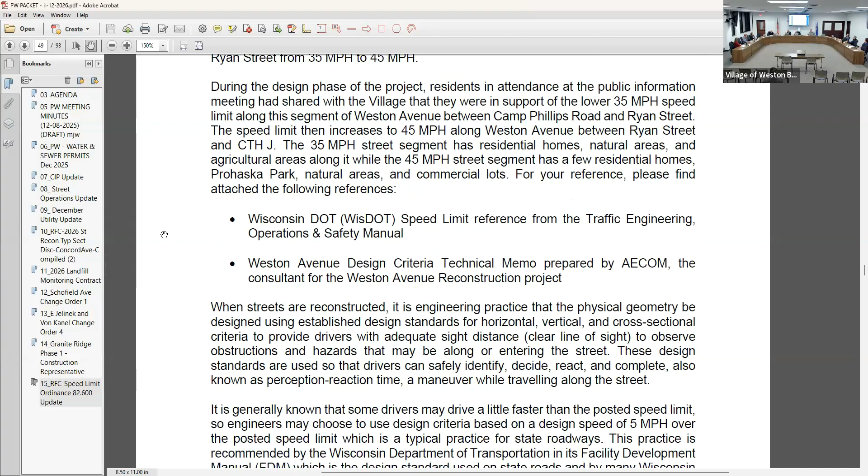CLPS was also down a member. They have an odd number, but someone was absent, so they had a 3-3 vote twice, which is why - I didn't know, I only got what I got out of the email, which was, hey, this is a contentiously discussed issue and nobody agreed.

It seems like the purpose of that committee is to do exactly that. That's why I said to Michael, I don't feel comfortable voting on any of this, because if they reach some conclusion and it has to come here to be approved, I understand that. But like I said to you, where would you send the resident if I walk in and say I want to address the speed limit, and it's not Public Works?

Step one would be there, so right, and that's why I'm not comfortable, because I don't think step one was completed. I understand the comments about other areas in the village that should be addressed on speed limits, but they have more stuff they should be addressing - that committee should be addressing that. I guess I'm big on the function of your committee being holding to what your function is, and unless someone disagrees, that's where I am.

We had that discussion about whether we should be discussing things like building changes, or if an apartment is going in instead - what does this fall under, Public Works? In the job description of Public Works staff, was that part of that? Because then we modified it to say significant changes to a building - our buildings, municipal owned buildings. So does this technically fall under this committee?

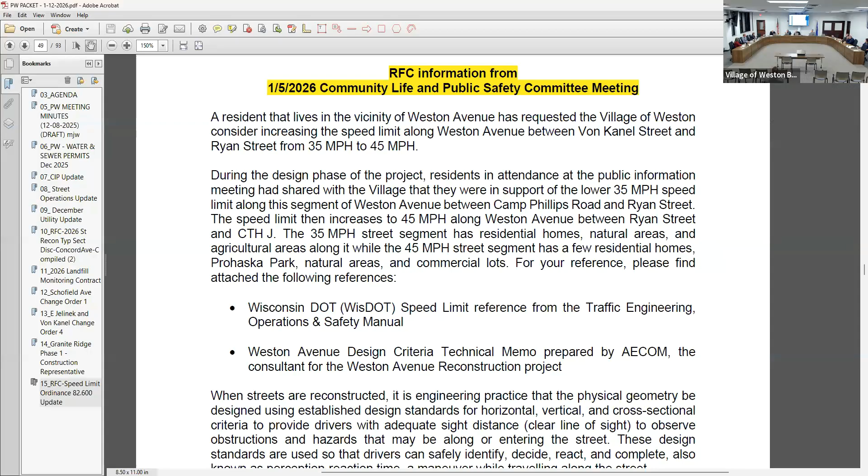Same thing with Ryan - Ryan is a busy road, especially on weekends.

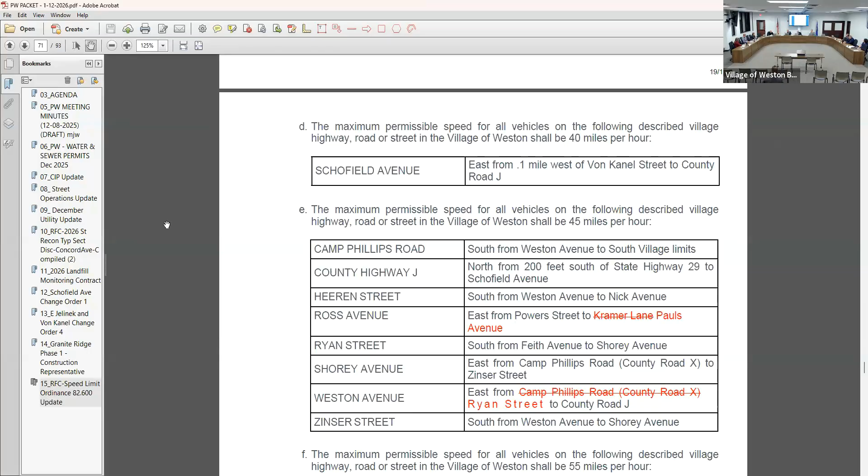I don't really want to take any action on it. You can send it back to the committee, or send it to the board. I think you should either go back to the public safety committee or the board, or both. That would be my take on it.

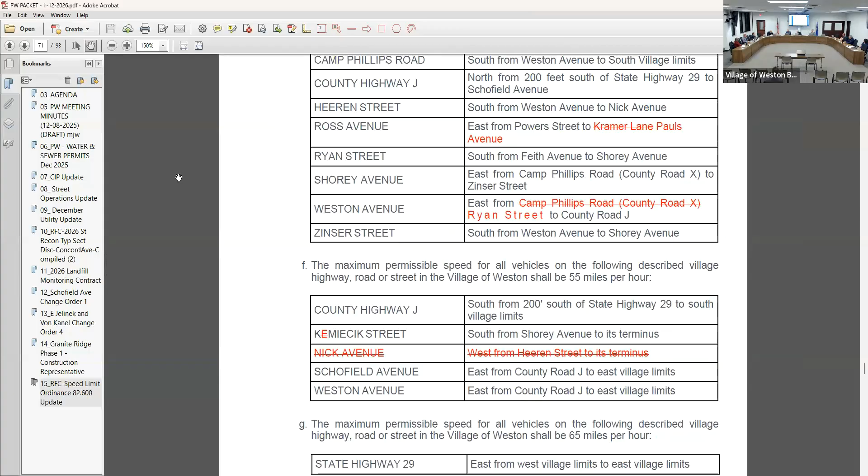Yeah, my only thought on this is, as straight as that road is, it does have a grade on it. I don't understand how the road is a better road than what it was. It was 45, now it's a better road and we're gonna make it 35. And if you make it 35, all the people that used that road when it was 45 are gonna be trying to pass people going 35. That's my concern.

I agree with that. Sometimes I think everybody wants the speed limit in front of their house to be 25, but they have no problem going 45 in somebody else's neighborhood. Not in my backyard. And I think we've gone way overboard, not only Village of Weston, but all over, in lowering speed limit signs.

I can think of a road on the way to my cottage. It used to always be 55, and a deputy with the county wanted it lowered to 45, and they gave it to him only because of who he was. But you improve the road, why should you lower the speed limit?

Just like Camp Phillips, crazy. The 4-lane is 35 miles per hour, and then when you get to the bad part, the 2-lane going up the hill, then it's 45. I know what happened because of the state project, but we gotta use our heads a little bit about lowering the speed limit every time somebody screams they want it lowered in the neighborhood.

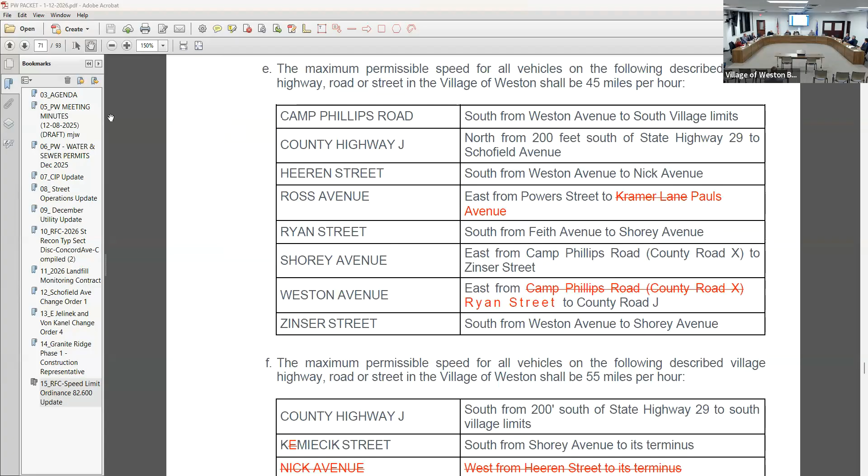Make a motion to send it back to the board. I'd move that Public Works table this discussion and it goes back to Public Safety Committee or the board, or both. I'd move that it be sent back to the Public Safety Committee for resolution since they had it first. I'll second that motion. All in favor signify by saying aye. Aye. Opposed? None.

Future item 16, next meeting date: Monday, February 9th, 2026 at 4:30 PM, regular meeting. Item B, Monday, March 9th, 2026 at 4:30 PM, regular meeting.

Item 17, topic for future meeting: Village-wide Wisconsin Public Service street lighting update. Michael, one of these days we're gonna talk about it. I was going to have it for this month, but item 15 kind of sidetracked me the last few days, so we'll put it on the next meeting.

Item B, consolidation of Ryan Street yard material site with the village of Rothschild. We can table this forever.

Water main replacement. We are waiting for that gentleman to come back and give us a report. Could you follow up with him, see where he is? I think we gave him about $3,500 for that project.